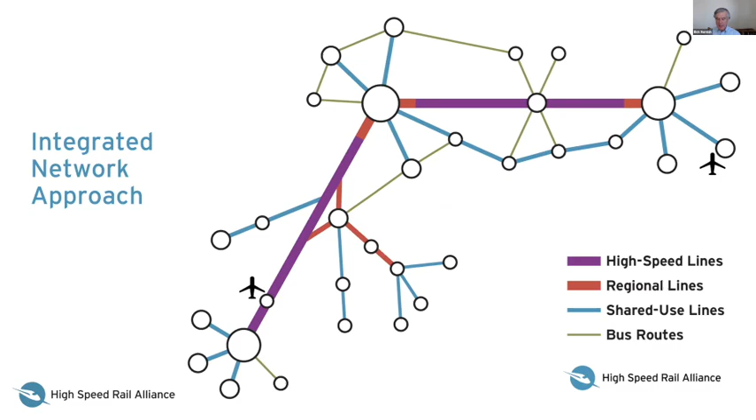As we move forward right now, we've got the best opportunity to make a difference that we've ever had, and probably certainly the best in 10 years. What we are striving for this year is the creation of a big federal program to build high-speed rail and transit across the country, again with different solutions for different parts of the network.

But certainly it needs to impact 49 states, with the Alaska Railroad seeing a huge boost. And I'd even be willing to say that there should be something in Hawaii, though that hasn't been discussed, to bring in 50 states. We need to be very optimistic.

We need to think big. We've got some very serious economic challenges and environmental challenges, and we really need to think big in order to solve those problems quickly.

And then a different thing that we're different from most passenger rail advocates—we really believe we need to start with what makes sense for the railroads. They have a strong role to play in the connecting portions of the network. We need to treat them like a vendor, just like we treat Boeing as a vendor in our defense systems, and they make a lot of money working for the government. We need to create that sort of positive relationship with the Class I railroads.

So I'm really excited to have Wayne Rogers here to talk today about their proposal for Maglev in the Northeast Corridor. Wayne is the chairman and CEO of the Northeast Maglev and Baltimore Washington Rapid Rail companies. It's a franchised railroad to provide high-speed service between Washington and Baltimore.

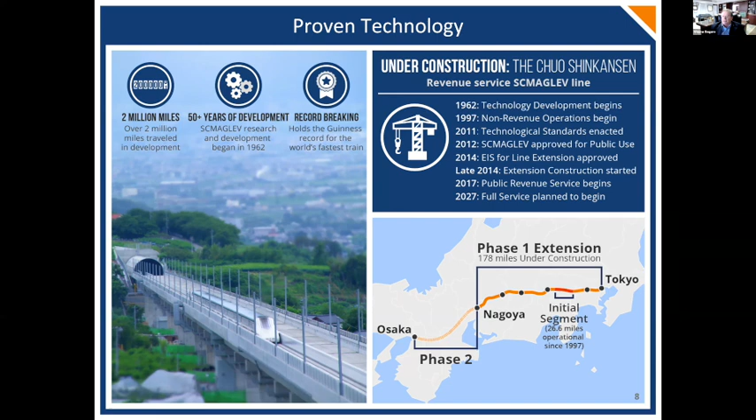If you look at the alignment, you can see it's mostly in tunnel inland. The current bullet train goes along the coast, so this not only provides faster 300-mile-an-hour trains on top of 200-mile-an-hour trains, it did not do away with the 200-mile-an-hour train. It was complementary, on a parallel and somewhat separate alignment, for reliability purposes.

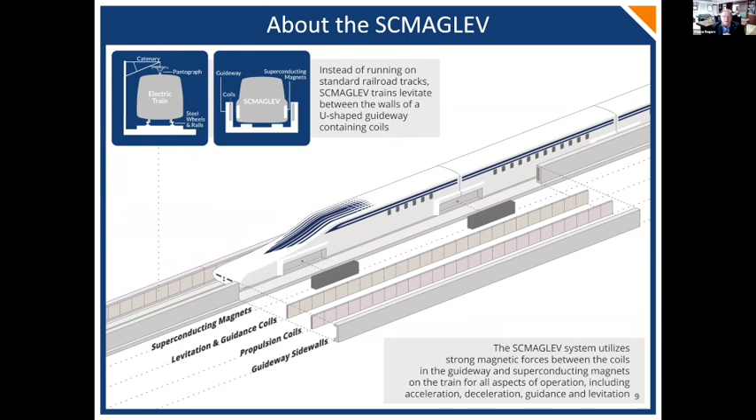Project accomplished to date: it's been 10 years of privately funded work. Maryland Railroad's franchise was granted in 2015. That's important because it means we, as a company, have the power to develop the railroad, eminent domain, and all the things that come with being an actual railroad without need of use of the government. We have an agreement for no-cost technology transfer from Japan, and an agreement from Japan to provide significant financial support.

Private sponsors are covering the state match for any federal grants, as well as private investment. The federal government has committed $54 million to date, covering federal and state environmental impact studies and further work. The draft environmental impact statement is complete. It's been 5 years in the process, including public hearings—we've had more than 200 public meetings getting to this point—and preliminary engineering design is also complete.

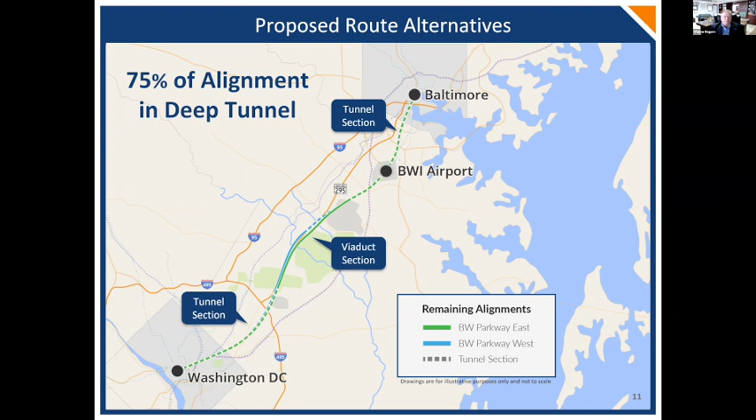Japanese safety standards require you to be either under the ground or above the ground, so there can be no issue of anyone crossing across the road with a high-speed rail. It's one of the reasons, safety by design, that they're able to keep the high safety standards that they have.

What is our schedule going forward? We hope the EIS and permitting will be completed in 2022 so that we can finish final design and start construction. As I said, we've been more than 5 years in the permitting. We did the single document permitting system, so we've had 30 state, federal, and local agencies all cooperating on one document.

That DEIS that was issued is over 4,000 pages long, so that all federal, state, and local permitting decisions can be taken from that one document. We hope that will be finalized by the end of the year or first quarter of next year, and we can move right into final design and then construction.

Talking about the three legs of our stool. First, tremendous economic opportunity, jobs, regional jobs, the construction just of Washington to Baltimore is 161,000 job years - 123,000 job years in construction and 38,000 in professional services. That means $8.8 billion in employee earnings. A huge economic impact.

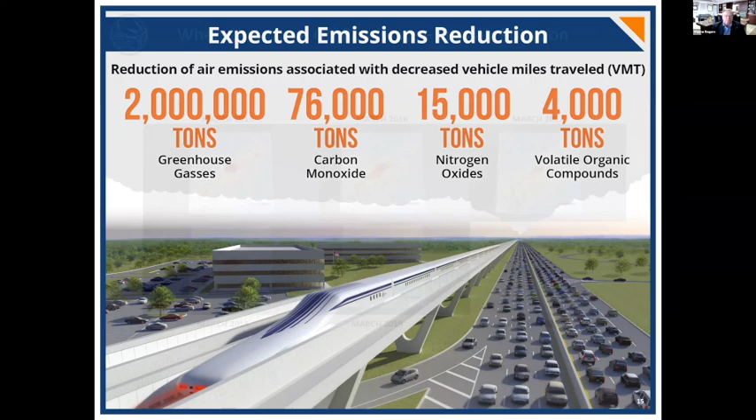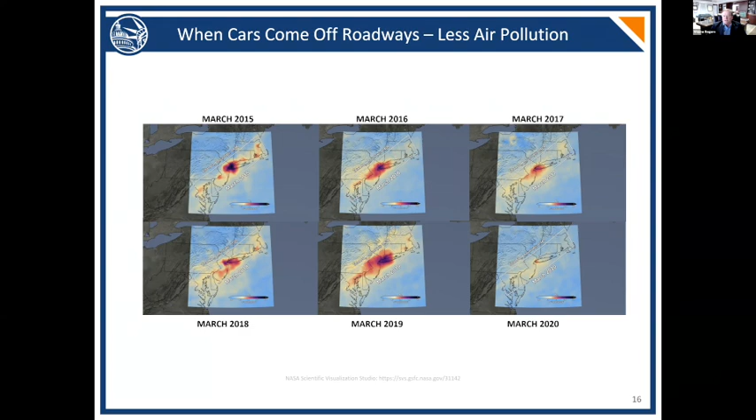Reduction in vehicle miles traveled - some people are going to say, oh, this may be competitive with Amtrak or a MARC train, which is the Maryland commuter train. It is not. What we are targeting is automobiles. Under the no-build alternative, 94% of the people in our area, DC to Baltimore, still get in their cars and drive - over 125 million trips a year just DC to Baltimore in automobiles. If we build the SCMaglev, we're going to divert somewhere 9 to 12% of the automobile traffic into this train, which is the equivalent of taking 11 to 16 million cars off the road each year. That's a huge number.

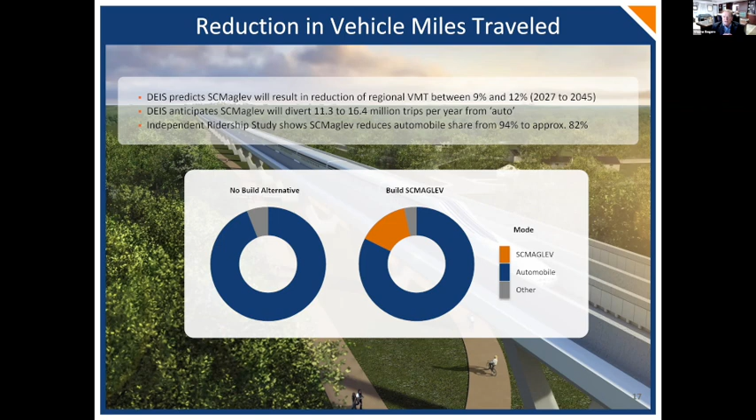And again, it's not surprising - we have 120,000 cars a day just on 295 between Maryland 50 and Maryland 175. That's 43 million cars in a very short section of that highway. It was originally designed in 1954 for a maximum of 50,000 cars a day. What does that mean? Health risks, not only with pollution, but health risks for accidents.

And if you do get in an accident, that's an economic risk. Those people spending an extra 102 hours in their cars are also spending $2,161 a year stuck in traffic. Plus, if you get in an accident on 295, it's a $1,500 average cost to repair even a rim damaged by a pothole. 61% of Americans couldn't even afford a $1,000 extraordinary repair. This is a huge problem. What Maglev would do is the equivalent of adding 8 lanes to 295, on a route that's never been improved since 1954 when it was built.

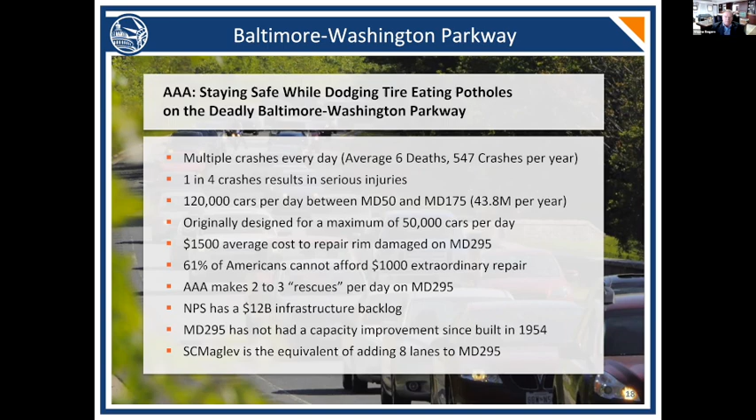Diversity, equity, inclusion - that's an important part of our proposal as well. For our workforce for construction, we're targeting 40% of our construction-related jobs in Maryland to go to people of color and women, which is a very large goal. Workforce development goals are normally 25% or so going forward, so if we can hit this construction goal, we'll be able to exceed our business opportunity and workforce goals for the longer term. We focused a lot on that. We have a written plan developed in cooperation with civil rights groups, and we've had lots of discussions surrounding that.

We see our project really as complementing existing rail. We showed you the problem of population in our corridor. Maryland Department of Transportation, MTA, expects that 70% of all MARC system stations will be at capacity by 2025 - in 4 years' time, every station is going to be at capacity. The answer would be, well, put on more MARC trains, but that's very difficult because we also have Amtrak running in the corridor at the same time, so any increase in Amtrak volume decreases MARC volume. You really have a collision of tremendous ridership growth with very constrained infrastructure.

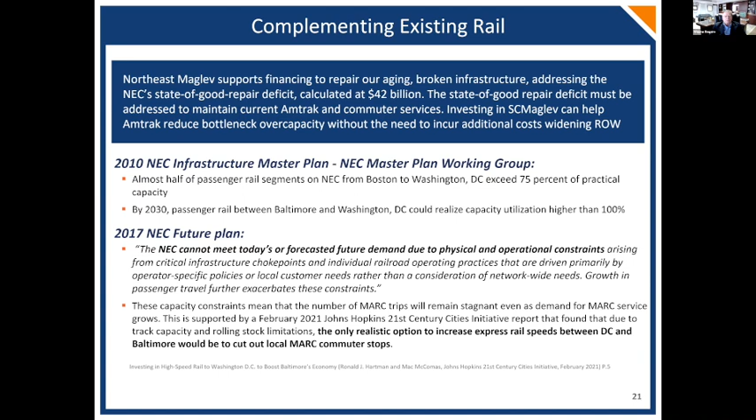The project has been endorsed by civic groups, union labor groups, and local business organizations, everything from the National Association of Building Trades to the Maryland Hispanic Chamber, the National Action Network, and chambers of commerce throughout the Eastern Atlantic states. So lots of union support, even down to church support. The National Capital Baptist Convention is supporting the train.

We have a petition online where people can go sign to support the project. So far, 19,500 people have signed the petition supporting it.

We did our draft environmental impact statement, with 6 live virtual public hearings on the DEIS, and 79% of the comments testified at the hearing were positive. For those of you in the infrastructure business who know what it's like to go to a DEIS hearing, it's usually the reverse—80% negative, 20% positive. We had written comments submitted to date, and 82% of those comments have been positive.

We've done public polling in the area. 86% of the people in this corridor support the Baltimore-DC Maglev. We even went to areas with less support, like Prince George's County, where there are concerns about only having Washington, BWI, and Baltimore stops, and they'd like more commuter rail stops in this high-speed train. Even there, it's still 3-to-1 or 3.5-to-1 in favor of the project. So project anti-voices are very loud, but they do not represent the majority of the people.

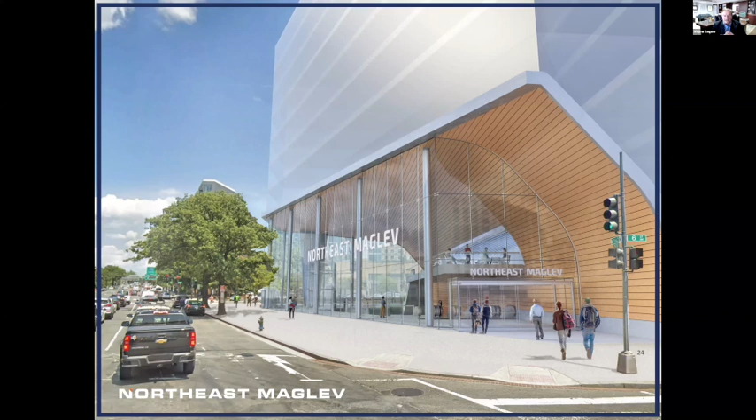This is some quick ones that'll show you what it's going to look like. This is the station—all new stations, all new infrastructure. It's a station in downtown DC that would be near the convention center. If you're familiar with DC, it's right across the street. And what you'd be able to do is not only be closer to the central part of Washington, DC than where Union Station is, but also connect with the metro lines right next door.

So you'll be able to take the Maglev, land in Baltimore Airport, go right downstairs, and in 8 minutes you're in downtown DC. Either go upstairs and walk, take the metro, ride, etc., and you could go throughout the city.

This gives you an idea what it's going to look like at BWI Airport. And why this is different is right now in the Northeast Corridor, the train stations are not at the airport. So if you're flying in, you'd have to land, as 25 million people a year do at BWI, go downstairs, get your luggage, go outside, take a bus to the train station, and then wait for a commuter train. What happens is most people just go out and get an Uber, get in their car, and contribute to the traffic.

Our plan is putting the station integral inside the terminal. So you'd be able to land in the airplane, go down one level, pick up your luggage, and then go down one more level and get right on the train. 5 minutes, you're in downtown Baltimore. 8 minutes, you're in downtown DC—faster than you would have just walking out front waiting for the bus to take you to the parking lot.

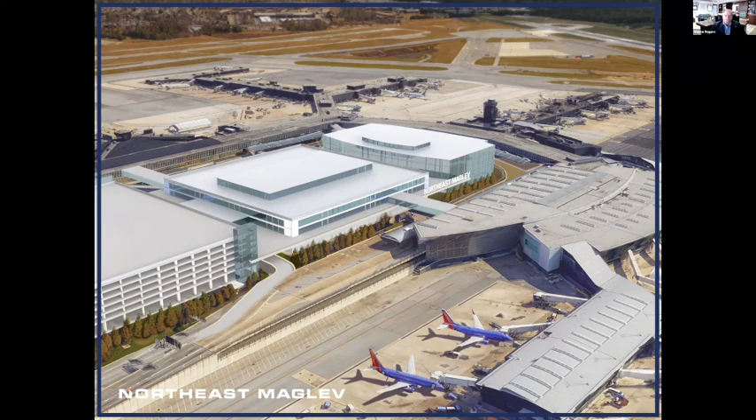Here's a picture of the Baltimore station. It connects into I-95, 295. The light rail station is right next door, almost right underneath where our station would be. So again, multimodal—think of it as an internet backbone. We have a 311-mile-an-hour high-speed rail that'll take you the long distance, and then the last mile could be walk, bike, metro, light rail, whatever you'd like to choose.

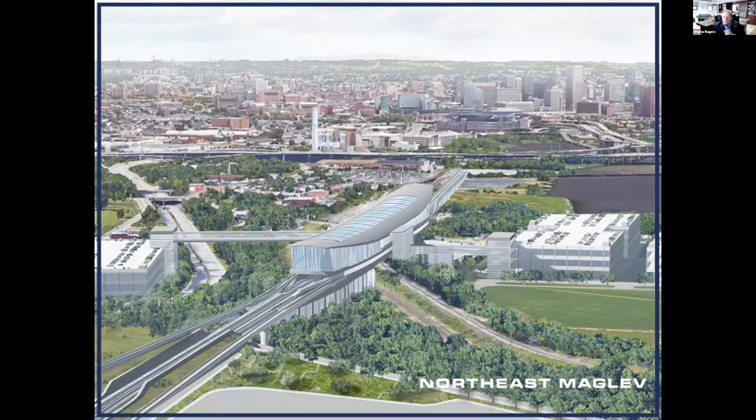I know not everybody has a chance to go ride the Maglev in Tokyo, but what we did is send a group of MIT engineering students to Tokyo to ride the Maglev with their professor, and I have to show you a quick video of their trip.

This is like another world. This is like the future. It is a dream come true. This is a marvel of engineering. Feels crazy. It's going to be an out-of-this-world experience. I'm ready to do this. I'm so excited. Let's do it. We're going back.

The train will soon make a transition from wheel-running mode to levitation mode. Listen carefully, and you will notice a change in the running sound. Oh my god, too fast. I'm getting so fast.

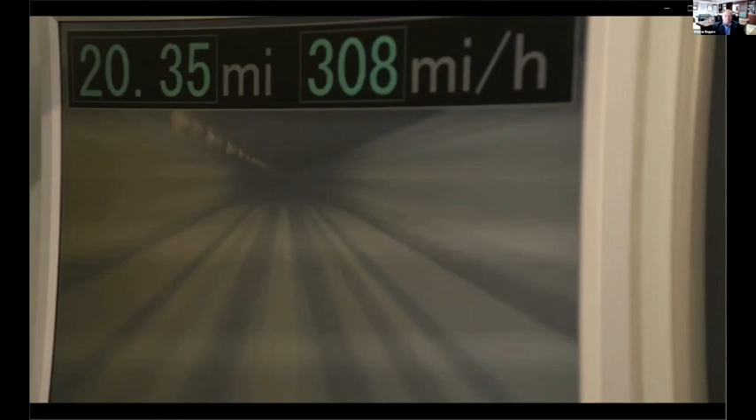Oh, that's great. There was more vibration with people walking to get off than there was at 300 miles an hour. I think it's a beautiful piece of technology by design, and then it's been implemented in this absolutely fantastic way. It was so much smoother than I expected. I could have probably taken a nap on the train and been very happy. It's extremely comfortable and quiet.

You immediately feel emotional to be there because it's like you're in the 22nd century. You could connect so many cities so quickly, it'd practically be a metropolis. You could be everywhere in just the blink of an eye. It'd be amazing. I think it's going to have a very big impact in the U.S.

Because it's going to not only change the transportation standard that we have, but it's going to force the U.S. to actually improve its infrastructure. It will change my life tremendously. Do it. It's completely transformed. It's amazing. You just have to feel it to live it. Ready for the ride. You'll have fun. You'll feel like you're in the future.

And then on the elevated version, it looks like the walkways are alongside. Yeah, the walkways are all along the elevated version, so you can get out at any point, really.

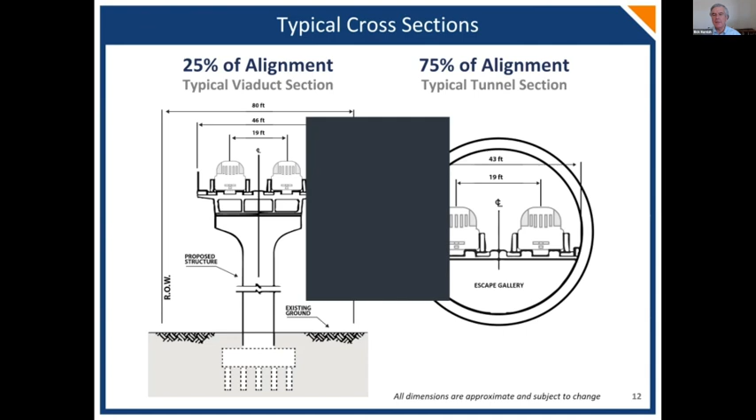So what's the timeline for getting to construction? Well, hurdle number one is completing all the permitting, which we feel like we're five years into. We hope that we can finish it off in the next year.

And if that's the case, we've got another year where we're doing all the final design and things that go with it, and the financing put together, et cetera. So we hope by 2023, if everything can stay on schedule—which, as everybody on the call knows, is a difficult pole in the tent, even with COVID on top of it—we'll have shovel in the ground. But there's obviously significant work in design and other things that are done before that, like land acquisition.

So I stumbled upon, but haven't read, a study that Stanford did in the mid-70s about the concept of taking a maglev and putting it into an evacuated tube to reduce air friction. Elon Musk took that concept, put a fancy name to it, drew some fancy drawings around it, and called it Hyperloop. And I know they're also talking with the state of Maryland about a similar route. How do the two relate to each other—different rights of way, et cetera?